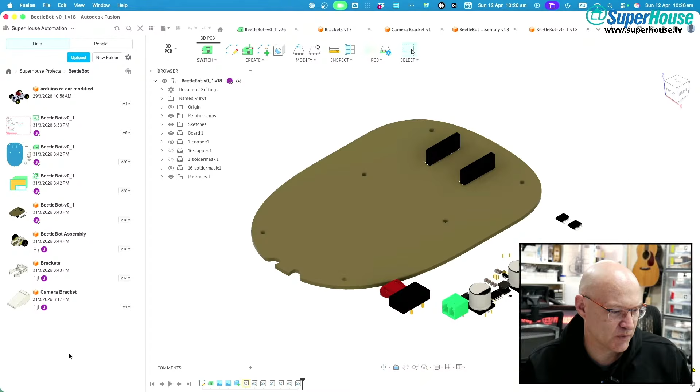I'm just wondering, I've got these two little compact PCs on my desk. One of those is running Windows, I believe, because I was messing around with some ESC software that was only distributed as a binary for Windows, and the other one is running Ubuntu, and I can't remember what's on it. I have a vague recollection that I had HAS installed on it, and I do also have HAS running in Docker on my Synology NAS, but it's not configured - I've just installed it, messed around with it, and that's it.

Okay, how about we actually look at the project for today?

Oh, Sion says, don't do HA, it's a total rabbit hole, once in you'll never get out. Yeah, that's quite possible, but I just keep coming across things where it could solve problems for me and do things I want it to do - things I currently do through Node-RED, or that I just don't do because whatever, I haven't done it yet. Reasons, things, time, you know.

Disk maker - my old name was Alan from Denmark. Okay.

So, welcome. Welcome, disk maker. Node-RED runs on HA. Okay.

Home Assistant is a gateway to ESP Home, says Paul. Yeah, that's another thing.

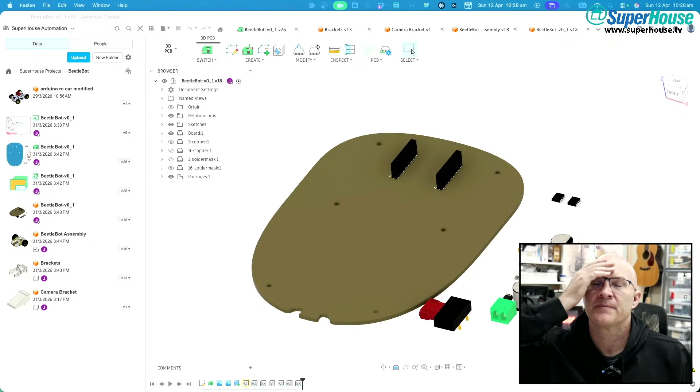You've probably seen Matt in the chat at various times, doesn't seem to be in the chat today, but he has been in the past. These PCs were previously inside payment kiosks for laundromats, and they've been replaced by other things. The payment kiosks now run Android head units with like a 42-inch touchscreen, portrait format, with an Android device behind it driving it.

So they ended up having a whole bunch of mini PCs surplus to requirements, and I've managed to finagle my way into having a bunch of them here, which is really handy. It's really cool just being able to grab a little PC, grab the Ubuntu installer which I have right here, power it up, stick Ubuntu onto it, and away we go. Tinker says surplus gear is a nasty addiction.

Yeah. Okay, so let's... Tinker says I have far too many i5 machines now, and another 40 on the way. Another 40, imagine a Beowulf cluster of those.

So now there's a throwback joke. How many people here remember Beowulf clusters from back in the early 2000s sort of era? Back when clustering PCs was kind of wild and out there.

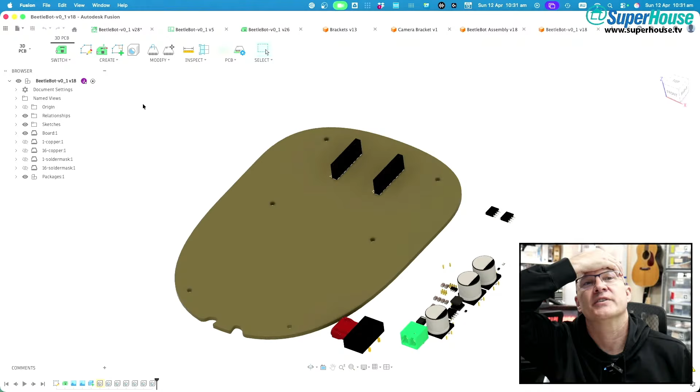Back in the 90s I did failover, like web server clusters with front-end proxies and load sharing, so DNS round robining and all sorts of those sorts of things. And what else did I do clustering with? I did clustered file systems like Gluster, GlusterFS, so file server arrays with clustered file systems. But that wasn't until... when would it have been? Early 2000s I think, it wasn't in the 90s.

Yeah, but the clustered web servers I definitely did in the 90s, running Squid in front of them as a reverse proxy. And there was some other reverse proxy I ran as well, can't remember what. Yeah, you can do the really basic.

Ooh, stop, coffee time, says Tassie Bob. Don't mind if I do. Thanks, Tassie Bob. Thank you, Tassie Bob, coffee time. That's actually a really generous...

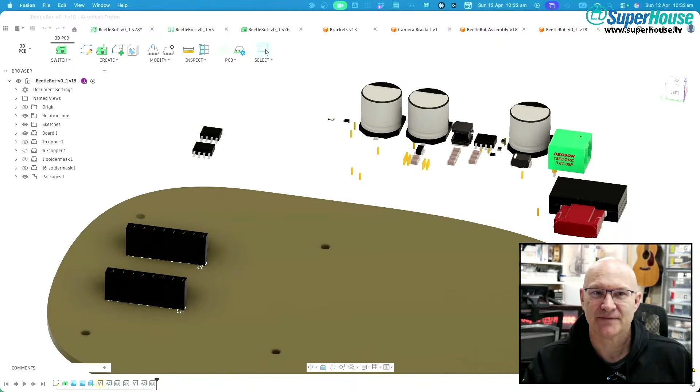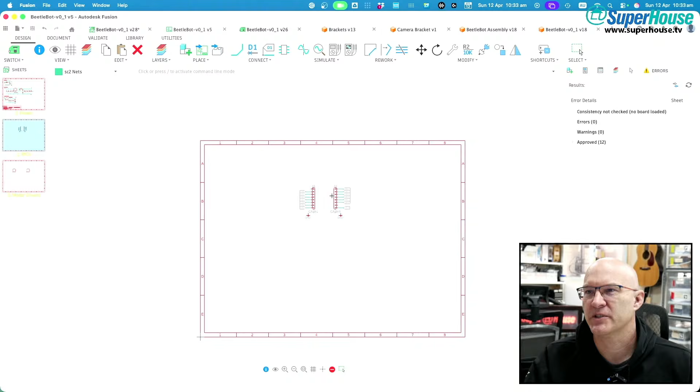We shall see. So this is for connecting the ESP32 cam. Now if you remember, cast your mind back to the early discussions of this project - the point with this was to move on from this design, which is the Lollybot design.

Is there a password on there? No, that's all right, I can show it. So this is the Lollybot design, which has the PCB chassis, motors mounted on top. It's got a Lolin32 Lite as the brains, driving two H bridges which drive the two motors with an onboard battery. This is the front, this is the back, drives along, woo.

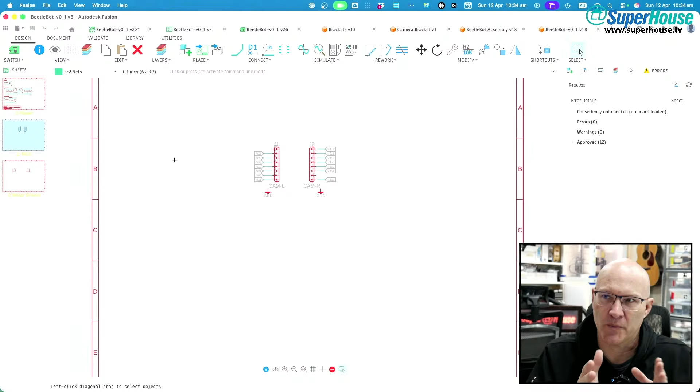Okay, now what I want to do is replace that with a system that has two processors on it. And the only reason for the two processors is that we want to add a camera onto the front of the robot. So we're going to have one ESP32 that does the outputs, it's going to drive H bridges, move the chassis around. So that is how we drive the robot, through one of the ESP32s.

Then we want to have a camera on the front, and in the short term, the simple way to do that is to use an ESP32 cam, which we're about to look at, which is a little module with a tiny camera on it. In fact, why don't I show you the ESP32 cam?

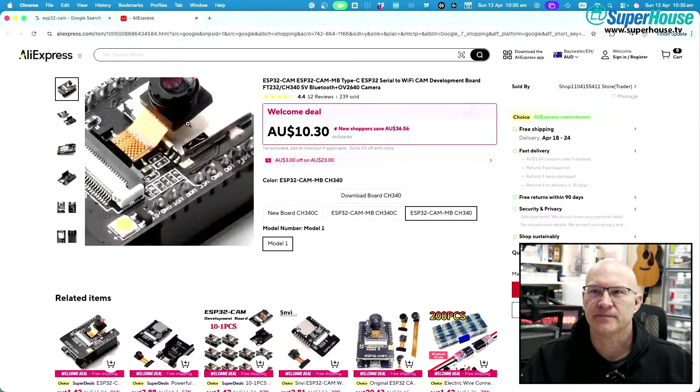Okay, so ESP32 cam, ESP32 cam MB CH340C. Let's look at this one, just as an example. This is a $10-ish board, including shipping, that has an ESP32 on it. Not that, that's the serial. Okay, I'm going to explain this a bit more. It has an ESP32 on it.

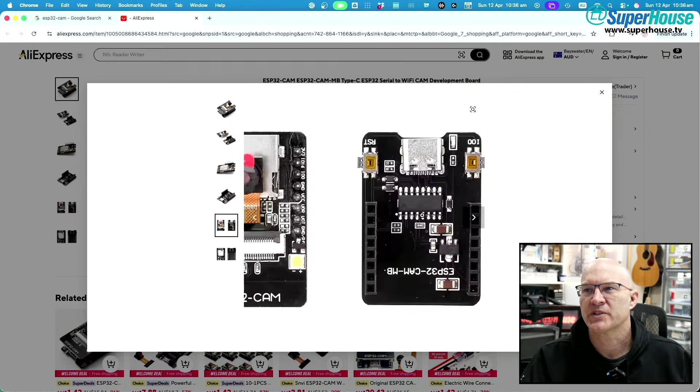And it has this camera. It's a very poor quality camera, but we're not taking glamour shots with this for a magazine. It's got the ESP32, the camera, an SD card slot, and some pin headers. It does not have USB on it, because this board on the right is a separate board which has a CH340 on it, a USB to serial converter, and a USB-C connector.

So what you can do is use the board on the left on its own. Which board is that? Here we go. Yeah, this is a better view. You use this board on its own - this is the one with the processor and the camera.

Or you plug it into this carrier board, which means you have USB that you can plug into it. Now, my intention with this is to not use the carrier board. The carrier board is handy if you want to program them standalone - you just plug a cable into it, you have the module in the carrier board, and everything is good. Life is unicorns and rainbows.

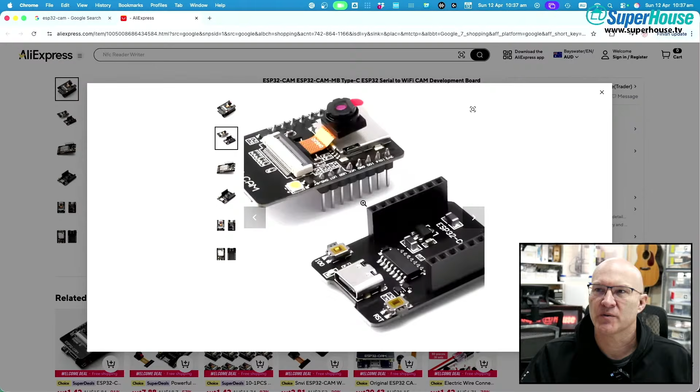But you can also just use this on its own. My plan is to use this board directly on the Beetlebot chassis and then pass serial comms through to the appropriate pins on here, and power to it, obviously.

So the question is, how do you physically mount this and get the geometry so that the camera is in the right place? This is something that has been debated through the ages - the ancient philosophers were at odds on this. They could not decide whether ESP32 cams should be mounted vertically with the camera at the top, or inverted with the camera at the bottom, meaning you could have a USB cable plugged into the top if you wanted, or should it be rotated sideways, in which case the clearance is better, it doesn't stick up as much, but the camera is offset from the center.

And also, how do you put the connectors in place to mount it so that this is at right angles to the main carrier PCB? So yes, the ancient philosophers could not agree on a solution. And I've come up with an idea which may be a stupid idea, and we're about to find out.

We are going to put it to the test. Now, this is my idea. You see the camera just here - in this picture, you can see that the camera is kind of just flapping in the breeze. It's got the ribbon cable, the FFC cable, going into this connector on the board, and the camera is not attached. The cable sort of pushes it down against the top of the SD card cage, but you can move it around.

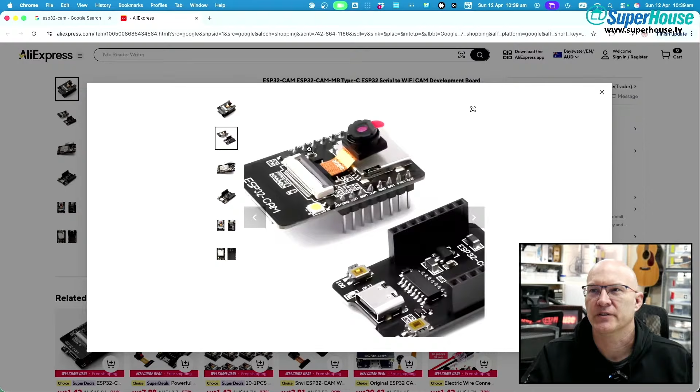Then my idea was, if you look at where the camera is right now, what happens if you simply bend it up so that it's vertical above the PCB and facing off to the left from this point of view? Can we mount it somewhere that allows us to put the ESP32 cam PCB horizontally, just plug it into the carrier PCB, and still have the camera pointing directly forwards? Can we? Maybe we can.

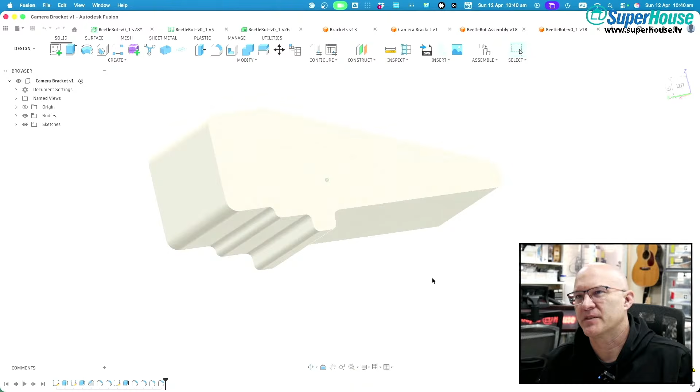Maybe with something like this. So this I designed and printed - this is all stuff I've done since the last stream. The purpose of this thing is that it's a bracket that glues onto the top of the SD card cage, and then the camera - this little guide here fits onto the back of the SD card thing - you push it on so that gets the alignment correct.

If we're looking at it from the side here, this area right here that I've highlighted is where the SD card holder would be. So it hooks onto the edge of it, you glue it down onto the top of the holder, and then...

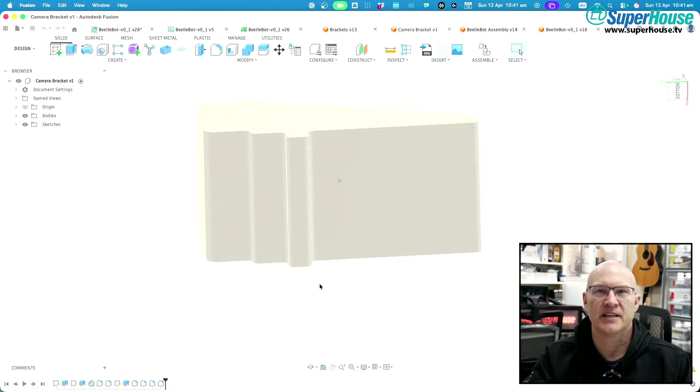This face right here is for the camera. The camera comes off, the little FFC cable bends up, and the camera glues onto this face. And because of this being a straight line here, butted up against the SD card cage, that forces the alignment, it forces this to be square onto the board, which means that the camera is going to be exactly horizontal from the PCB.

If you imagine looking from the back of the PCB, it's going to be looking straight down on the PCB from here. It's going to be aligned pointing forwards.

So let's see how that turns out. This is step one in a series of reveals of things that I have already done and have not yet necessarily tested. Oh, I've got to turn that camera on.

I totally forgot about that one when I was setting up this morning. I have my box of ESP32 cams here, including this one, which we will get under, where will we do it?

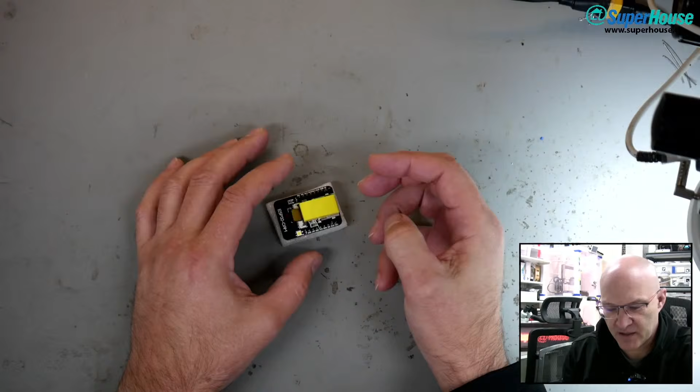Under here. Oh, I should zoom way in for this. Will I, won't I? Yeah, I will. I'm going to zoom way in, which is going to require... here's one I baked earlier. So I'm going to get focus sorted on that. About there. Exit focus assist.

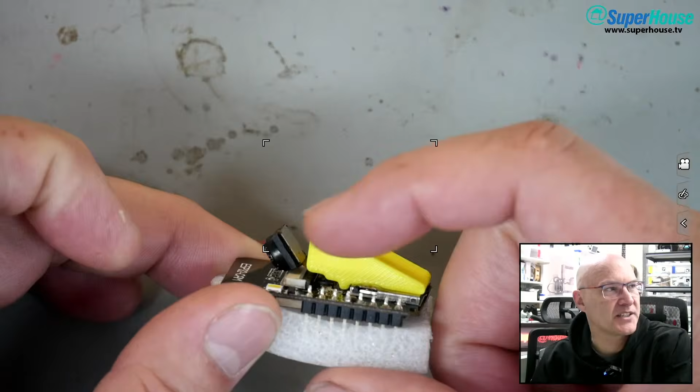So what you can see is this yellow thing is the 3D printed version of what I just showed you on the screen. The little ridge is under here. If I grab my trusty pointer, the little ridge is just under there, butted against the back of the SD card. This is glued on just with some of that Loctite gel glue, so it's pretty secure.

This face is where the camera will go, and you can see the camera here is just sort of flapping around. Now, the general plan with this is that the camera will be glued onto this face so that it is just pointing straight forward.

Now, this is the big unknown. I have a vertical constraint. I will show you this constraint in CAD in a couple of minutes. For now, I'm not going to explain it. You just have to trust me on it, and you will see why in a minute.

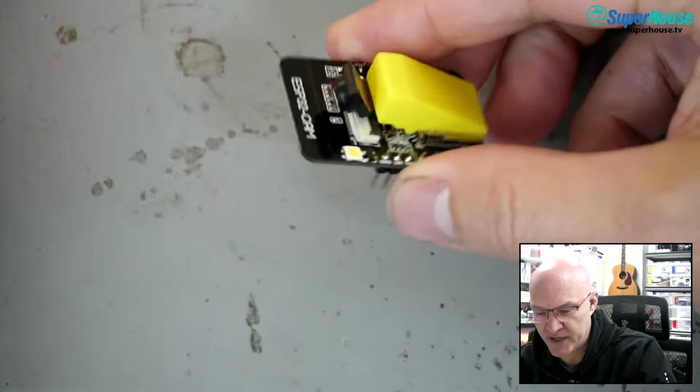There is a vertical constraint on the space that we have here, and the top of this bracket is the top of the constraint. We can't be any higher than that point. So the camera needs to butt onto the front of this and be pushed down slightly so that it is flush with the top of this mounting bracket.

So this raises a possible problem with the field of view of the camera. And this is what we're about to find out. Right now, ladies and gentlemen, we are going to do the experiment. What I don't know is if this camera is glued into this position, and if we look at...

What can I use? What can I use? Okay, I'm going to use this. I'll use the bottom of the box so that it's not visible because, come on, get in there, because it would annoy me.

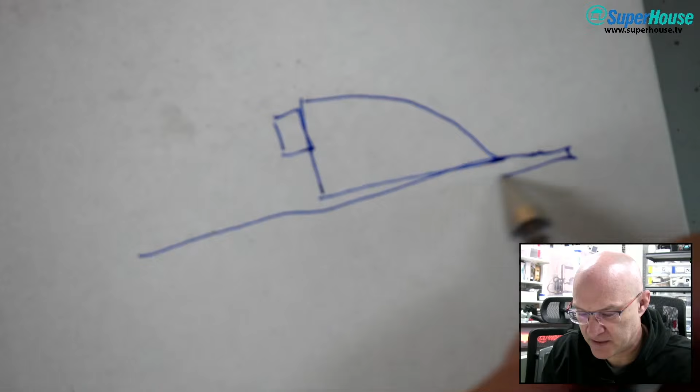So we've got the camera attached to the bracket, which is on the PCB like that, with the headers sticking down underneath. Brilliant artwork. Now the camera is going to have a field of view.

The question is, right there, is the field of view going to intersect the corner of the PCB? And if it does, does it actually matter? Is it enough to be a problem, or will the field of view clearing the PCB give us enough of a view of the front, looking out from the robot, to be able to see what we need to see? So that is what I want to find out.

Looking straight down on here, if that is there, imagine the light ray coming from the bottom of the camera out here. Is it going to touch the edge of this PCB?

So I figured that we just connect it up and see what happens. If this works, this is going to be a very easy solution to mounting the camera, because printing and gluing this on is very easy. Just stick the camera on there, bada bing, and we're done. And I really like that because...

Tinker001 said, those cameras are easily available with different length flat cables. Oh yes, that's a good point.

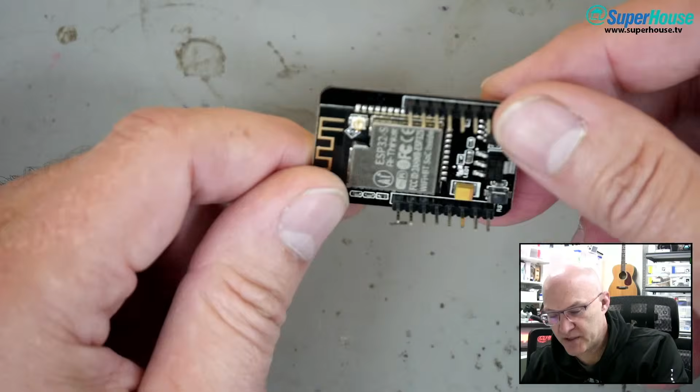So just in case you couldn't hear it, what Tinker just said is that these cameras are very easily available. I think it's like an OV something, I can't remember the part number. Very easily available with different length flat cables. So one option is to simply buy a camera with a longer flat cable, and then we could mount this wherever we want it. It could be mounted on the front of the bot and have the rest of it somewhere else.

So that's true, yes Tinker, thanks for pointing that out. Now, one of the design constraints is allowing for other people to replicate this. So if I don't mind doing things like buying an alternative camera and replacing it, that is one extra little barrier to someone else building one of these bots. It'd be nice if you could just order an ESP32 cam and use it pretty much as is, just by mounting the camera like this, and not have to buy this plus another camera.

Now, before I actually get to powering this up, I'm going to explain the reason that I want to mount it like this. So switching back to CADtastic, we've got Beetlebot assembly. Oh, I showed you something prematurely.

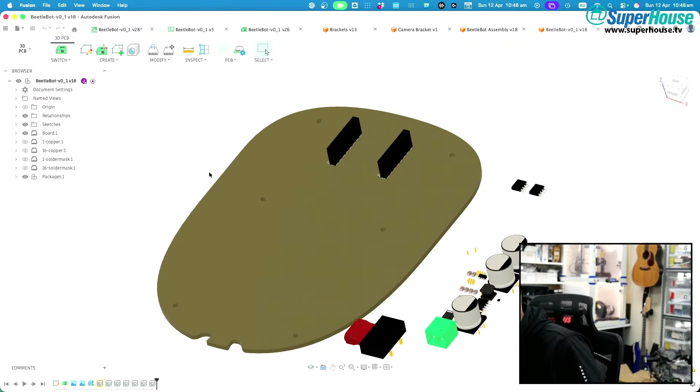This, so the PCB, I showed you the headers that I added here as placeholders that don't have the nets connected. Paul Schultz said, what's under the ESP32 CAM writing? What's under that writing? Oh, it's the antenna, the short answer, Paul.

So switching back to here, yeah, so your question was, what's under the ESP32 cam writing? And my assumption is that you're asking, can we just cut that off? Are there any components under there? There are no components on the carrier PCB, but on the bottom it's got the WROOM module, and you can see that the PCB antenna protrudes past there. So one thing that could be done is to cut off this part of the carrier PCB.

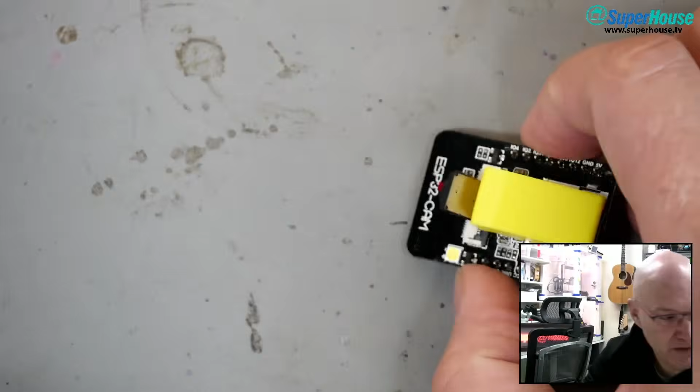We could score it with a knife along the top, just a line along here, and then snap it off by bending it away from this PCB, which would gain us a little bit, but you would still see the back of this PCB underneath. So Paul, yeah, that was a good question, and there is a possibility that something could be gained from that, but it's not as clean as you might have first thought of just cutting the end of that board off.

Yeah, so this is the orientation of the bot, and it's got a couple of changes. Now, you will see there are some holes in it. There's this little thing on the back here, which I'll explain in a minute. And these are the two connectors for the ESP32 cam. You can see that I've aligned them pointing directly towards the front of the bot, and it is set up so that you can plug the ESP32 cam straight down into it.

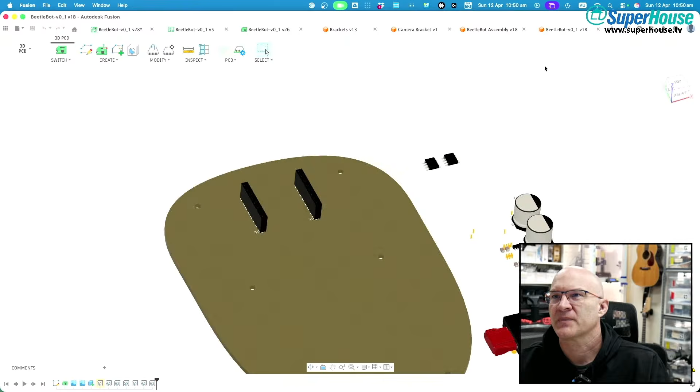And if the camera is mounted as I was showing on this bracket, the camera will be right about here, pointing directly forward off to the right here. And what this would allow is for us to have the main chassis PCB with the connectors. You get an off-the-shelf ESP32 cam and just plug it in and mount the camera on that little guide.

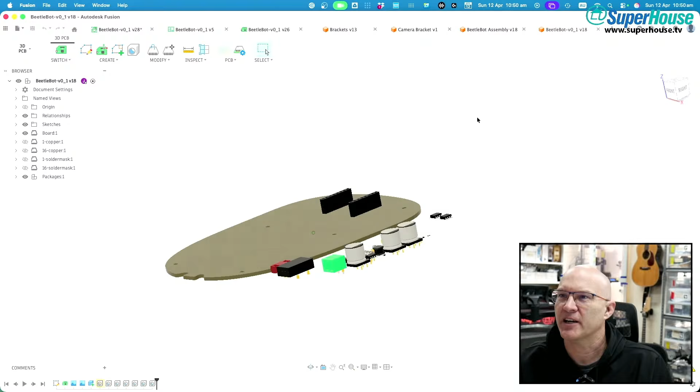Now, okay, I was talking about the vertical clearance constraints. So I have a project here, you can see it's called brackets V13. As I was working on this, I was figuring that I needed a way to mount the motors. So I started by setting up, all right, my original idea was I'm going to make a 3D printed bracket that will attach to the PCB and that the motor will attach to.

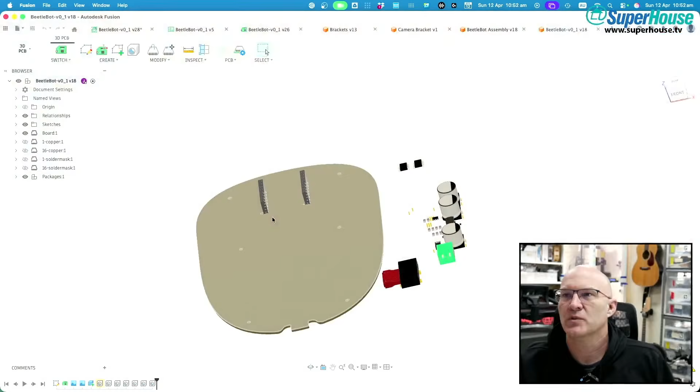So what I did, this was the sequence. I opened Fusion with the intention of designing a bracket that would mount the motor here, and the bracket would basically be a block. Austins_creations said they used a 3D printed mount and bolts to mount those motors.

Ooh, cool, nice one Austin. And Tinker's comment, which should be coming: can't mount the motors until cable tie shows up in the chat though. Yeah that's right, cable tie's not here. We need cable tie in the chat, and then we can mount the motors.

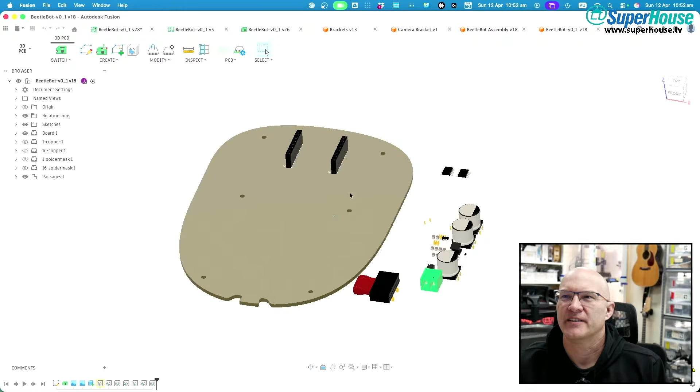Yeah, so my plan was a couple of 3D printed brackets. What actually happened is I started by doing a sketch in Fusion which was a projection of the outline of the PCB, so I could make the brackets fit the PCB perfectly. I began with this shape and extruded it so I could carve out the bits I didn't want and leave just the brackets. As I was doing it, I realized I could just make the whole body like that.

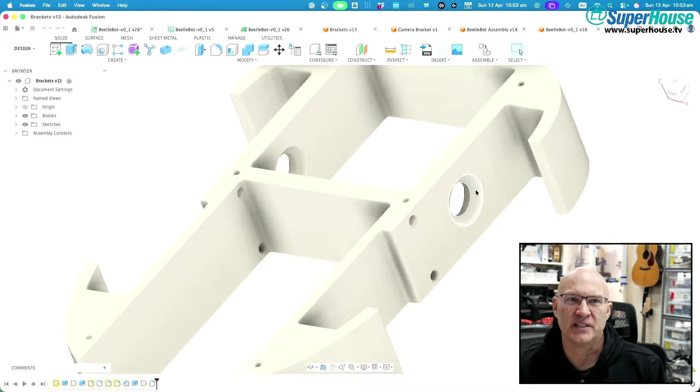And I ended up with this. This is a 3D printed bracket that has mounts for the motors. You can see there are holes here for bolts to mount the motors, one on each side. This hole is for clearance for the back side of the axle, because the motors have an axle that goes through them and sticks out on both sides. We have a wheel on one side and nothing on the other side, but that side is still there, so this is clearance for it to go through.

Then there's the back of the motor, which comes here. In a moment you're going to see all of this for real. There is clearance in the back here for concealed wiring for the motor power.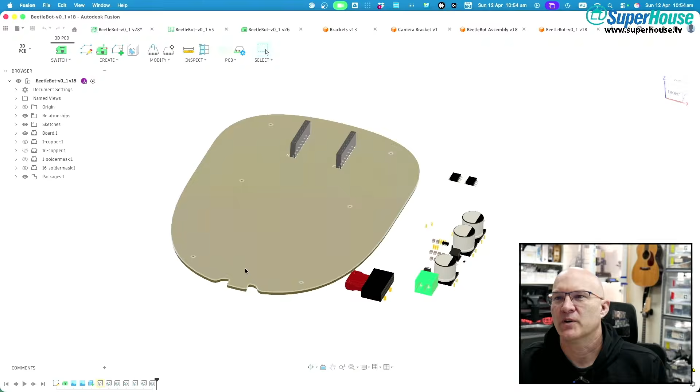This is looking from the back of the bot towards the front, and you can see this cavity in here. This cavity is for a battery, so there's going to basically be a hole in the back of the bot, and you can slide a battery in and then retain it with rubber bands, which is what these shapes are for. But I'll get back to that in a minute. Okay, then we have this cavity in the front.

So as you can see, I started with the outline. This outline was projected from the PCB dimensions, from the cut layer, the milling layer, so it's a perfect match to the PCB outline. You can see the holes in it here are also based on projections from the holes in the PCB. There are 6 of them, 3 on each side. If we look at the PCB, they're an exact match to these holes, but they're smaller.

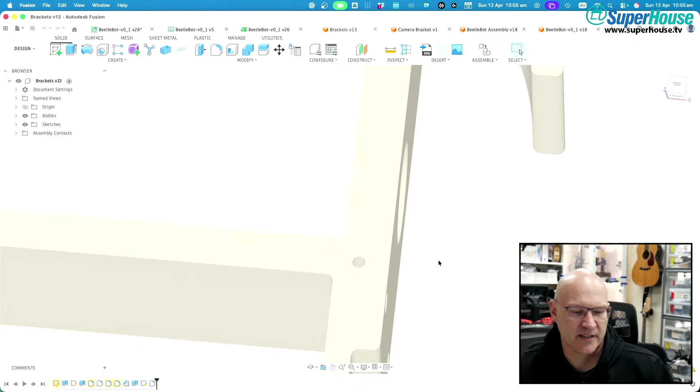The holes in the PCB are, what are they, 2.4 millimeters, and the holes in the plastic are smaller, like 1.7 or 1.8, so that 2 millimeter self tappers can be used. If we have a look at this one... oh, those shortcuts don't work in physical mode. What have we got? We've got 1.6 millimeter holes. So 2 millimeter self tappers will go through the PCB and into the plastic.

No, I didn't want to sketch. Okay, so they go through the PCB and into the plastic to mount the PCB on the bottom of this bracket. And the PCB will then form the bottom part of the cavity where the battery goes in.

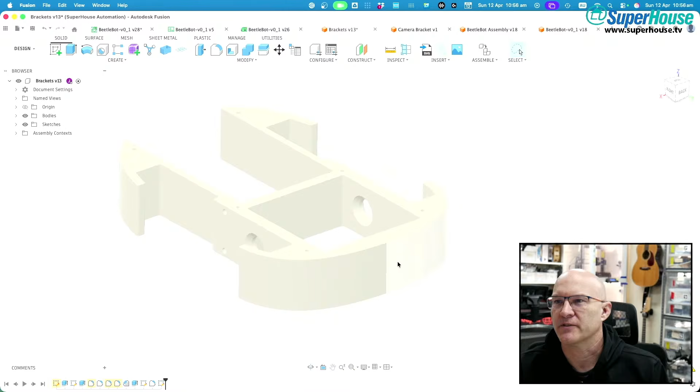Then the ESP32 cam goes on the front right here. It was at this point that I was looking at brackets and how to mount the camera and how to mount the whole ESP32 cam. That was when I decided, hey, why not put it in horizontally and then angle the camera to bring it forward. And that's what we're about to test.

So this sort of thing is the PCB. Is this out of date? It doesn't have the connectors visible. I wonder if... or is this out of date? One of my... no. Where is the 3D representation? Yeah, okay, interesting. I wonder why I have those hidden in there.

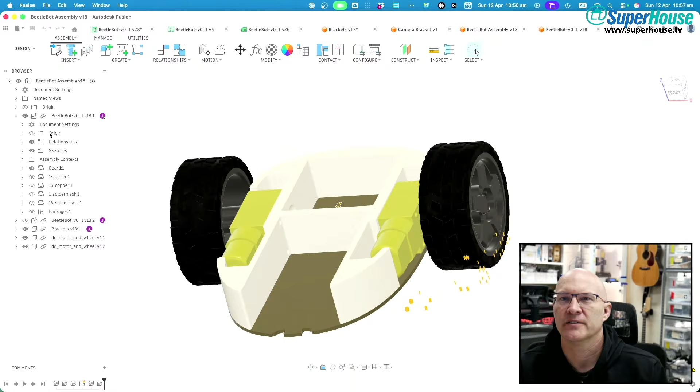If I have a look in here, what have I got? Solder mask packages. Oh okay, I just hid it so that these ones would disappear. So you can see the two headers in there for the ESP32 cam to mount. I'm going to have to carve a hole out of the front of this for the ESP32 cam and for its camera. You can see here that there is a cavity.

Now these motors are not exactly in their right place, I think, in this model. Yeah, I moved a couple of things. They need to move. Oh no, that's right, the models aren't quite accurate.

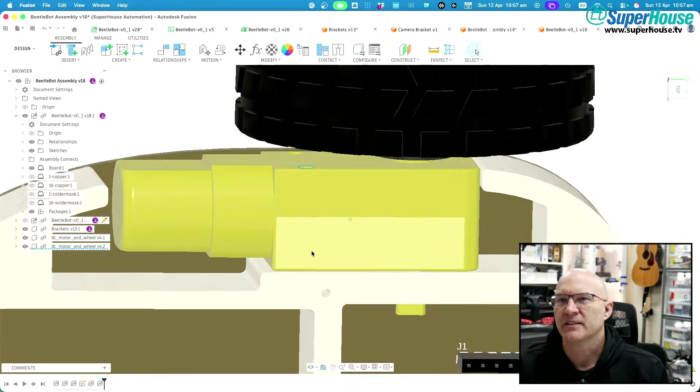The way these work is that this hole is aligned with the hole in the motor. But the thing is that this 3D model I imported of the motor and wheel assembly is not entirely accurate. It's actually sitting slightly further back, because on the real thing the holes through the motor are very slightly further forward, which means the whole thing sits further back. It looks like it's jammed up against the front here and like there's a big cavity at the back, but it's actually pretty even in real life, like when it's physically printed.

Right, I have some iterations here. Which one was one?

Yes, so this was the first one I printed, which had a few issues. I needed to adjust some clearances around here to make the motors more stable. There wasn't enough room here, and the motors tended to twist in this way because the mounting holes were right up close to the edge.

So this was iteration 2, and I extended the support, increased clearance around the front of the motor, made a couple of other minor changes. This is iteration 3, which has more clearance around the front of the motors. It's got clearance at the back so that the wires to the motors can be concealed - almost concealed anyway. They will go onto the PCB, onto little connectors or something inside that gap.

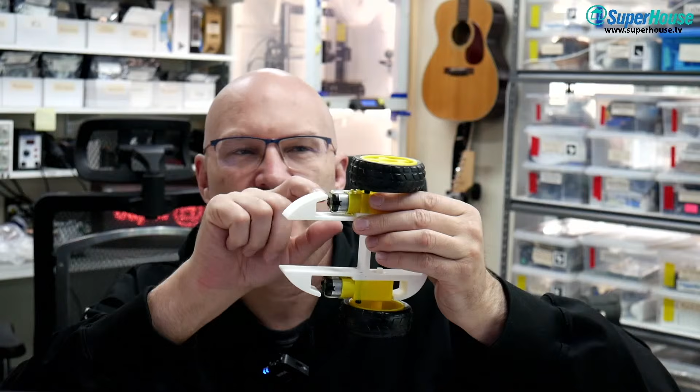So that is where we need to put the motor output wires on the PCB. Apart from that, it all does what it should.

So if we look at this, this is the Lollybot, basically overlay that with that. Imagine that the Lollybot PCB - we don't have the real PCBs yet, but imagine the Lollybot PCB is the PCB that goes on this. It'll screw on, and you can see the outline of the PCB following around here. And this PCB has squarer edges at the front, but imagine that the PCB was rounded off so that it matched the contour of the plastic, and that is essentially what we would have as a little sandwich.

So it's coming along. This is the reality of this concept.

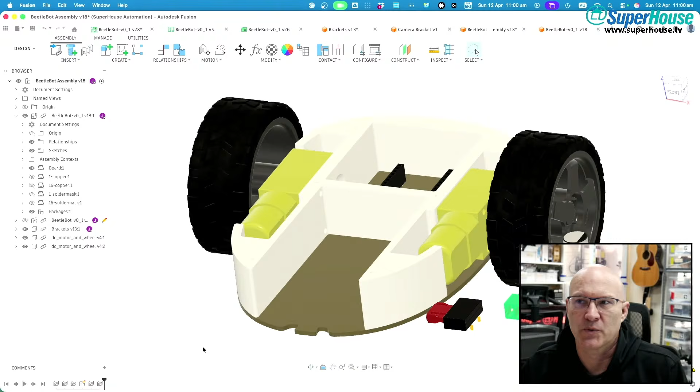Now this gets us back to the ESP32 cam. Oh yeah, sorry, and explaining here - so what's going to happen is that there will be a top deck as well screwed into the top. We've got the PCB, which is forming the base.

Then we're going to have an identical shape on top, which will probably be laser cut acrylic, but it could also be another PCB. I've been very seriously thinking about this. What I could do is design a second PCB which is mechanically identical to this one, so we'd have a bottom PCB and a top PCB.

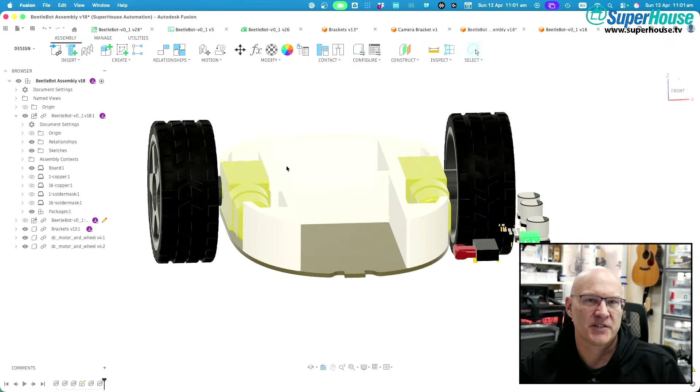And the top PCB would have locations for mounting the arm that sits on top of it. So it might have holes, like screw holes through it, for mounting the bracket for the arm on the top. It could have electrical connections - we could pass through from the bottom up to the top. We could have some connectors for the power and control of whatever external things are added onto this. Like if we add a robotic arm onto it, we're going to need power and control - they could be brought out to connectors.

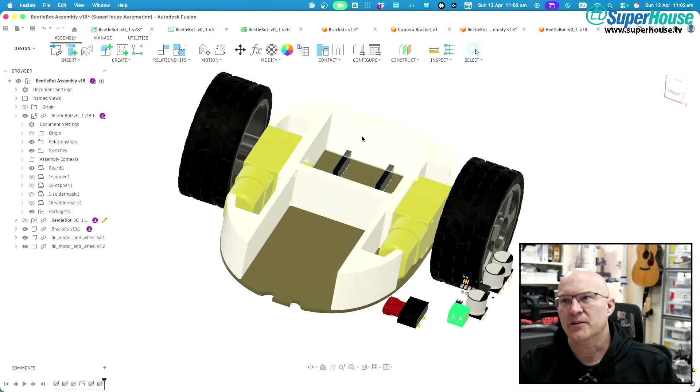So I think what I'm probably going to do, for my very first iteration, just to get this done quickly, is order the bottom PCBs and just laser cut the exact same shape out of acrylic and screw it into the top. That'll get us a little platform that can drive around with nothing attached on the top of it. And then that'll allow us to do testing of the basic movement functionality, like the motor control and the camera.

And then while that is happening, and while the software people are doing their magic with this, I can then move on to designing the PCB that goes on top, which could be optional. I mean, what you could do is build the bot with just a plain top cover, or you could build it with the PCB top cover, which gives you extra things.

And we could also have multiple PCB top covers. So we could have one PCB top cover that is suitable for mounting a robotic arm onto. You might have a different PCB top cover which is designed for a LiDAR, so it's got the correct mounting holes and pinouts and all of that sort of thing.

TTS being dumb again. Design the top plate. Oh no, I think it just hasn't caught up. At Tinker001 said, various optional top PCBs. Optional diamond cutting disc. Okay. Yeah, it was just taking a while.

So design the top plate as a grid of M3 circles. Becomes a pegboard of sorts. Yeah, and Tinker said various optional top PCBs. Sorry, I wasn't paying attention to chat. You are definitely thinking along the right lines. Austins_creations said, design the top plate as a grid of M3 circles, becomes a pegboard of sorts. Yep.

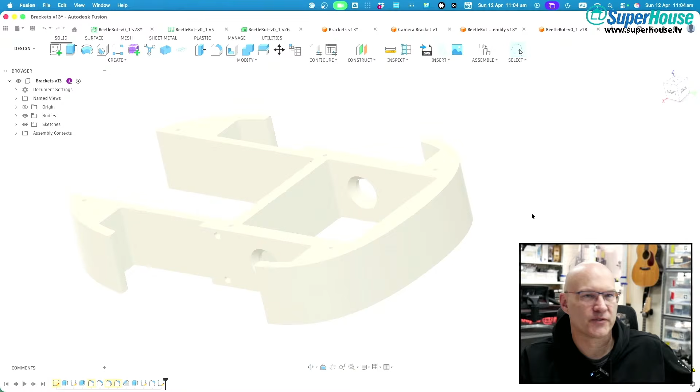Yeah, that was my original plan. That's actually what I was going to do. So I had got to the point of designing this and printing it. I'd already gone through these iterations and got to this point, and I was looking at the front of this thinking I wanted to flatten it off and make a way of mounting the ESP32 cam on it.

And that was when I decided I would investigate doing it this way instead, with the headers this way, so that the ESP32 cam plugs in there. Now it's not going to get in the way of other things, because if it's plugged in there, and also the height—this is where I was talking about the vertical clearance.

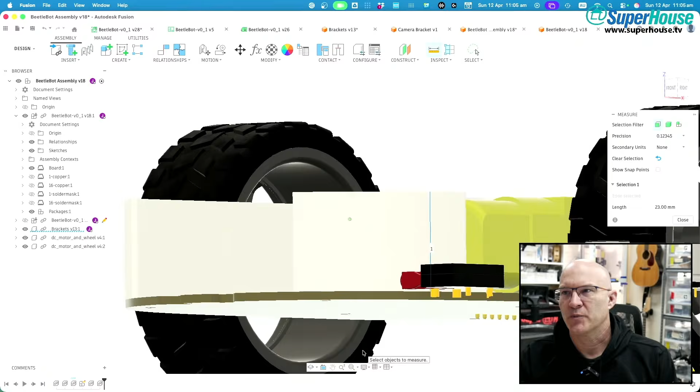So if we look at that distance, that is 23mm. That's the thickness of the 3D print, which is based on the thickness of the motors. Now it doesn't need to be—you could make it thicker, but it's just a sensible sort of thing. We don't want to make it too thick either.

So if that's 23mm, and then these connectors are typically 8 or 8.6mm high, by the time you add the plastic on the bottom of the pin headers, and then the ESP32 cam, then the SD cage, and then the bracket on top of it, that ends up being 23 millimeters high. It fits perfectly under there with the camera attached.

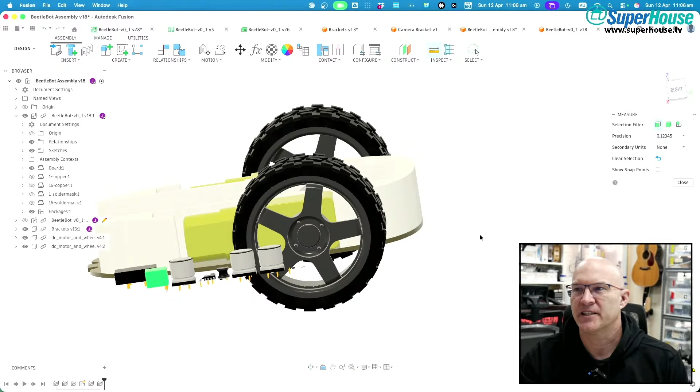So then, yeah, maybe later I'll end up designing a different way of doing the camera. But for now, this is a very quick way of getting to an end result. And that's basically where I left it. It was at the point where there is no point progressing with this design until I know what the field of view issues are with the camera.

Disc Maker said, how about 2 pink LEDs as lights on the vehicle? Yeah, well, there could be lots of LEDs, RGB LEDs or something. Some illumination. It probably should have headlights or something.

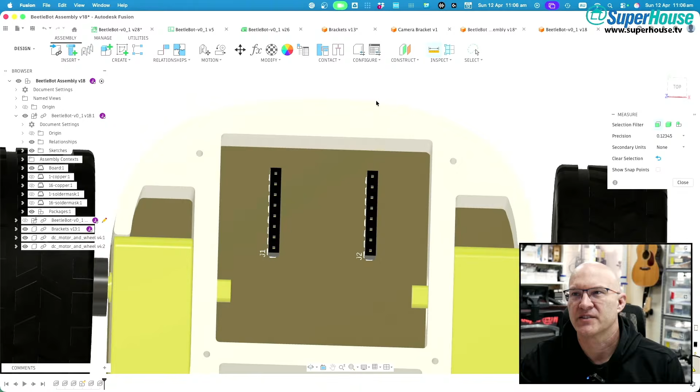Grant says, how does the camera see through the wall, or am I missing something? No, you're not missing anything. What I need to do is carve out the middle part of this, so this wall will be missing. You can see the width of the camera module from here. It'll actually protrude out to about the front point here. And I'm just going to have to chop a rectangle out of this so that it can see through.

But before I do that, this is the thing—this is all a bit unknown right now. Tinker001 said, prying the pin spacers from the ESP32 cam board would give you an extra 2.5 millimeters of height clearance. That is an excellent point. So if you couldn't hear that, Tinker said prying the pin spacers from the ESP32 cam board would give you an extra 2.5 millimeters of height clearance. Yes, that is an excellent point.

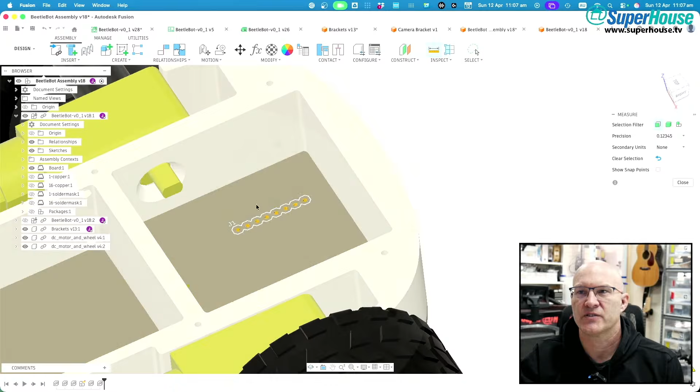And there are also low profile sockets that you can get. And the other thing I could do is not use sockets. What I could do is just put the ESP32 cam straight into the holes and solder it on from the bottom. Then it would be elevated by 2.5 millimeters, which is the thickness of the plastic spacers above the PCB. And that actually may be best, because if you look at the camera bracket, all of this is sitting above the ESP32 cam, which occupies sort of—whoops, that's not what I wanted.

I wanted a—no, that is not at all what I wanted. Can I do a selection? In fact, why is that selection mode doing that? What has happened?

Create. I must have hit some weird selection mode. Fit, zoom, look at - I don't even know how that, grid and snaps, viewports. I don't even know how I got into that selection mode.

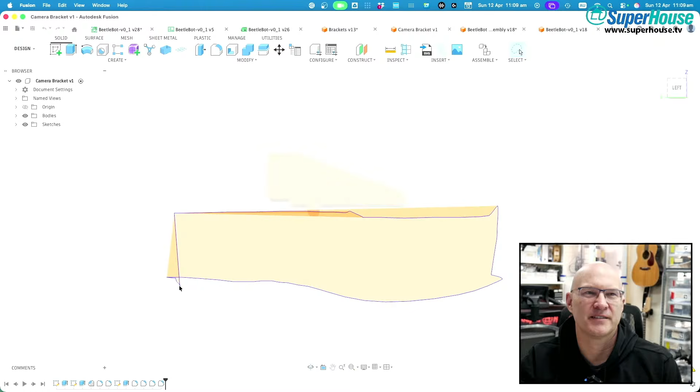All right, let's try it this way. If I go from there to there, there, there. Okay, kind of there is about where the ESP32 cam board is. And this is butted up against the top cover, which means the camera is not in the center of that cavity, it's right at the top, which means that the top cover would need to have a rebate to give the camera a better field of view, or that the top of the field of view is going to be cut off entirely, which may not be such a problem. But step one is power up an ESP32 cam, see what happens.

Wagonline says, can you use a cell phone zoom lens to poke the lens through a front hole? Maybe. Yeah, I don't want to change the field of view too much though, because the bot does need a reasonable field of view in order to drive around and find things, and to recognize characteristics in its environment for the machine learning system to deal with. So I don't want to give it too much of like a telephoto tunnel vision sort of effect. I want to keep it a reasonable field of view.

Now, I think I need to actually do this. What is going on with that? I don't know, I don't know. There is a USB to serial converter there.

But that means I need to find jumpers. This is my little jumper cache. Oh yeah, this'll do, I need to go pin to socket. I only need 2 of them. So these 2 connected to power on this.

Where is power on that? There is 5 volts, ground. So I think it's these 2. Those 2 should be 5 volts. Yep, looks good. Okay, I've never actually powered this one up.

This is brand new - brand new, like 5 years old, or however old. And I don't know what firmware is on it. What I'm hoping is that it's going to have some firmware that is half vaguely sensible.

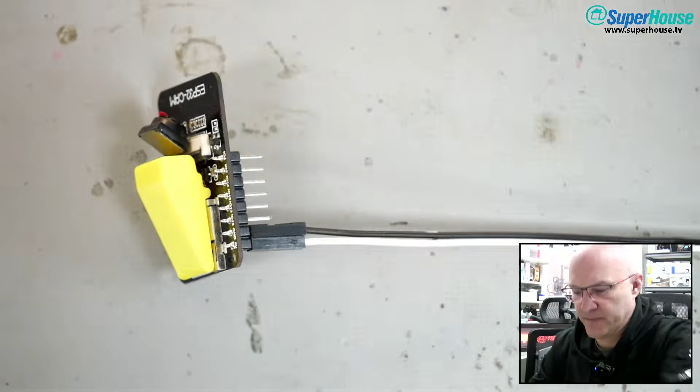Get out of that. Got to set the lab supply to some sensible amount. Let's give it 5 volts, 1 amp. And we'll power it up. Now we're super zoomed in, but that's okay. All right, and power on.

Do we get any indication? Well, it's pulling 160 milliamps, so it must be on and running, must have its Wi-Fi up. Now I'm going to give it just a moment to boot, so it should be booting. Then I'm going to look for it from my phone, see if I can connect to it. But I'm going to have my phone slightly off camera, just in case.

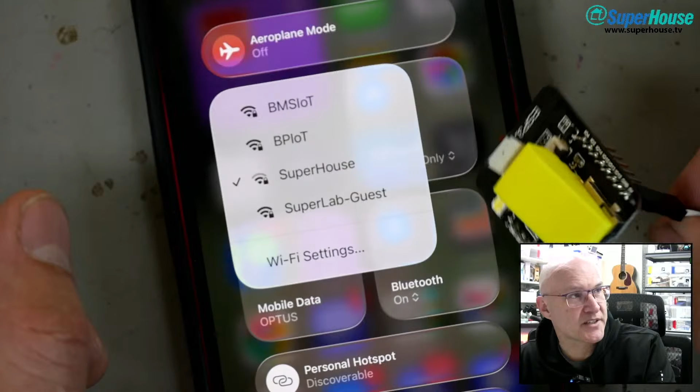While I connect, and we'll see if - yeah, it looks like it hasn't come up yet. See if this updates, because I think what these do is come up as an access point so that you can configure their Wi-Fi. I may be wrong about that.

It could be that I've got to configure it through serial or some other method. Hang on, what was that one that just came up? I don't think it was the one I'm looking for. Yeah, there's a TP-Link something somewhere. That's not me though, and it's not this.

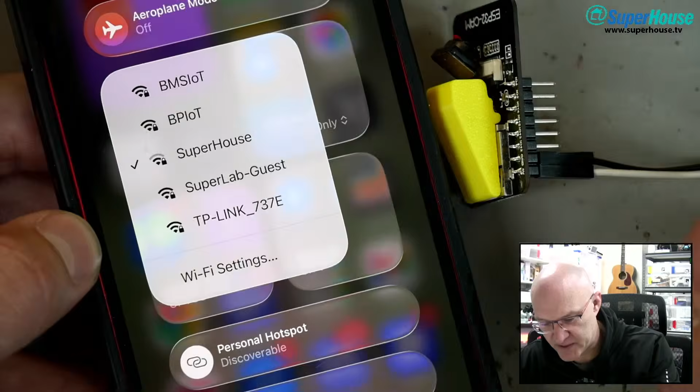Weird thing is, TP-Link is the strongest network here, stronger than Superhouse. Why is that so weak? Maybe I'm connected to the AP down the back of the factory instead of the one that's just close. I think TP-Link might be next door.

Alright, it looks like we might have to actually do some USB serial shenanigans to figure out what's going on with this. It doesn't seem to be going into AP mode. Is there a way we can put it into AP mode? There's a reset button. Resetting it multiple times might do it, but that depends on the firmware.

ESP32 cam, okay, let's have a quick look at an ESP32 cam getting started sort of thing. My SSID - oh, mine had no software on them. I have 3. Says Jiski.

Okay, I'm gonna bring you back to here in just a moment. ESP32 cam - yeah, the ones that I've got, so I've got a few of them, and I'm pretty sure that out of the box they had some demo firmware on them.

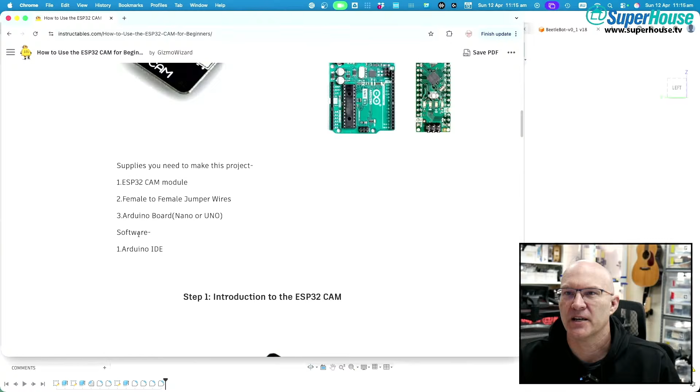So, ESP32 cam for beginners - let's see what it says. Supplies, introduction to that, let's skip through this. And it does not have a USB port. Preparing the Arduino IDE for programming. This is suggesting that you need to flash it with something. Attach according to that, okay. Oh, I wonder what that is - that's probably putting it into bootloader mode. I bet that's something like ground and IO0.

Do all of that, store them in a folder, and that - fake Wi-Fi credentials. Alright. It's a little bit sad that you have to do all of this - I thought that it would have something out of the box.

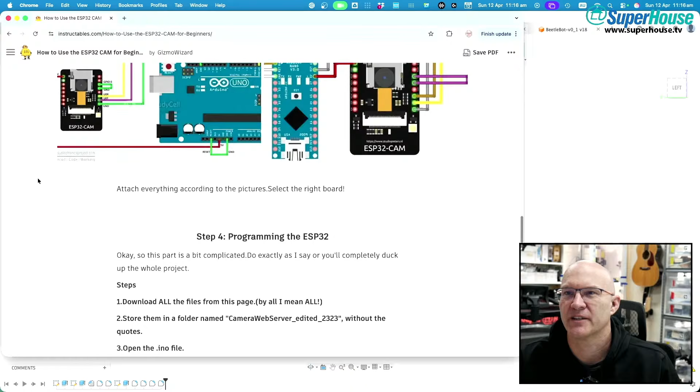Let's start by hooking up the USB serial board so that we can at least see if there's anything booting on it, which would be step 0 before we - and we've got to do that anyway. If we're going to reflash it, then we need to. Instructables is still around - Instructables, it is.

So I'm okay. What do I need to do? I need to leave that open. Alright, we've got TX and RX - which is which? And... okay, so TX out of there is going onto there, and reset. So it's got a reset connection as well. We may not need that.

In fact, I don't think we do. For a USB to serial converter, that's probably just so that both boards reset at the same time - we're not even doing that at the moment. We're going to be using a USB to serial converter. Let's move over to here and do it for real.

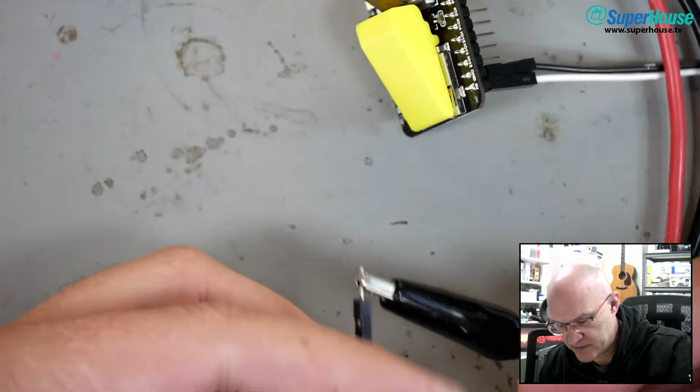Ooh, this one - this is one that I've had running in the past. Let's see what happens with this. Turn that one off and connect power to this one. So this one was previously connected to the USB to serial adapter, so I've just turned that one on. I suspect this one is not going to come up as an access point.

It may have some other firmware on it because it was being used to do stuff. And on this one, the camera is glued down. But we might get lucky, so it's worth a shot. I'll see if it's come up on an AP... I'm not seeing it.

Other, new, update, update... No, I suspect that the firmware on these does not support being an AP. So I'm going to switch this cable over, use the other jumper wires on this one, because this is the one where I want to check the field of view. So we're going to go...

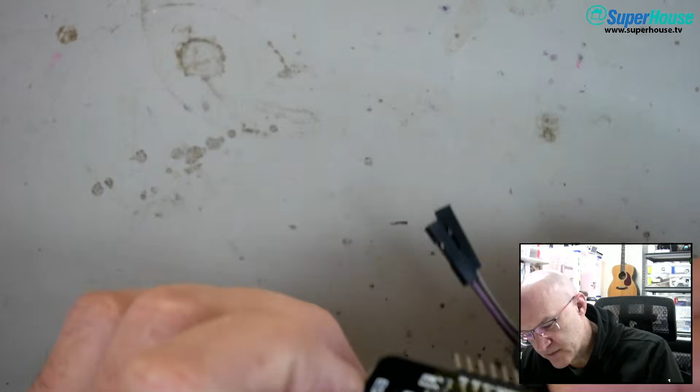Where is it - ground and 5 volts, these two. And then I want TX and RX, which are where? Come on, your eyes must be better than mine. You what? I don't know, I don't understand what that means. The labels on this sort of thing are weird. Okay, I'm gonna have to look at the pinout on this.

Oh no, I've got the... is it that way? Yeah, so that's reset, RXD. I'm just going to attach these two and then I'll figure out the colours at the other end. So it goes into the second and third along on this side - that should be TX and RX, which means that the grey one here, which is this one, is going to TX. Yeah, you can't see what I'm looking at.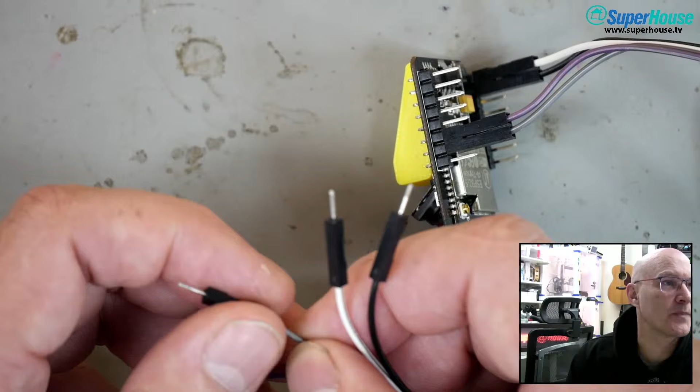I'm looking at the pinout diagram. So that is going to TX on the USB to serial converter, and TX is there - so that's TX out. This one is RX in, goes to there.

At Austin's_creations said, Arduino has an example sketch that you upload and edit with Wi-Fi info. It is what I did when I ordered mine way back when. Nice, thanks Austin. And V out coming from there for 5 volts to power it.

Okay, so we have this wired with this, and then we can connect to it from Arduino IDE to flash it or see what is going on with it in general. So I need a USB cable, that one, and I'll plug this into the hub on my bench.

There we go, powered up. So hopefully this will now be booting. If there is anything on it, we will see. Let's find out.

Okay, while I'm waiting for Arduino IDE to boot, what is going on with the chat? Okay, Wagon Load says: I programmed my ESP32 cam with a USB FTDI UART adapter and 4 wires. Yes, that's exactly what we're doing right now.

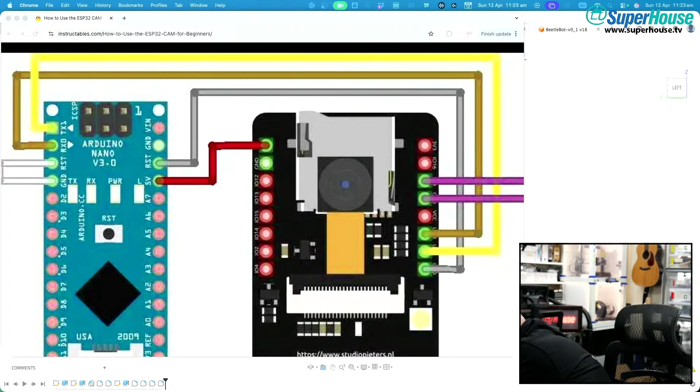I am going to hit reset while you can't see, just in case it does dump credentials or something to the bus. I'm not getting anything on serial comms, which is interesting - I would expect to get at least a startup message of some kind. All right, I'm going to try. The pins on the bus go high and low, high and low.

Okay, let's find the 'If you have fewer' example. If you have fewer than 16 devices connected, you're a slacker. Yeah, I have fewer than 16 devices connected.

Well, I had 4 serial devices connected, plus all of the other things. I've got 1, 2, 3, 4 USB hubs plugged into this computer with multiple things in each hub. So I don't know how many things I have on the bus at the moment, but it's a few.

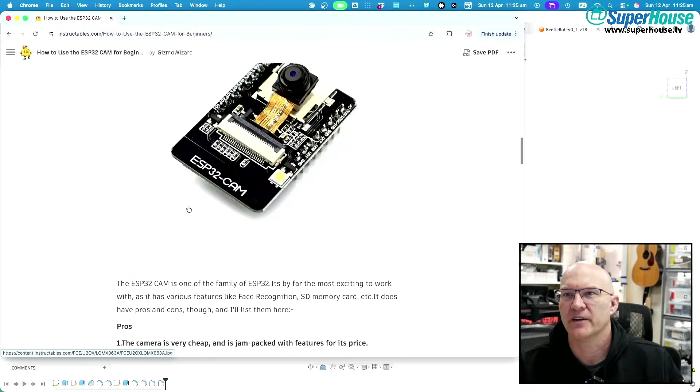All right, where is the example for this, the ESP32 cam? Now I need to grab - what I need to do is come back to here. How to use ESP32 cam for beginners. Where is the code? All right Austin, do I just grab the code from here, or is there somewhere else that you recommend?

Examples menu - yeah, but where? There is a very big examples menu. If we go to, like if I just bring Arduino IDE up here so you can see it. I've clicked, waiting for it to open its menu. Come on, come on, I have clicked the file menu, open Arduino IDE, you piece of rubbish.

You'll get there eventually, come on Java, do your thing. Okay, now examples, where is the ESP32 cam? Now first thing I'll do is, actually I'm going to change - okay come on, here we go, hands off, waiting for it. Okay, I'm going to change this to...

ESP32 Wrover Kit, is that the one? I think that's what the README said - ESP32 Wrover Module, that one. I think that's what this says.

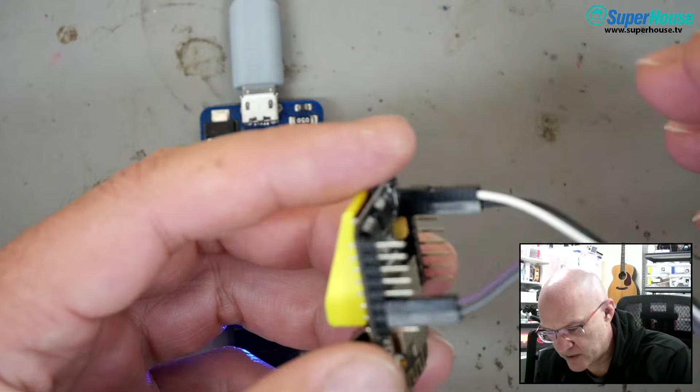Might also need to be in download mode.

Yeah, true, that's true. I should bridge IO0. _creations said, might also need to be in download mode. Yeah, it probably isn't because I don't have RTS connected to reset. I could just connect that. That would be a solution.

Crispian says, is it time for bed already? Maybe. And Stephen says you aren't controlling IO0 or reset. Yeah, I brain farted on that one. I kind of got so used to having that being taken care of for me already that I wasn't even paying attention. So...

Where's a suitable chunk of wire? One of these could do it.

So I think what I'm going to do in the first instance is connect RTS from the USB serial converter to reset, so that we've got auto control of the reset line. And if that doesn't work, I'm just going to poke it in the brain: I'll short IO0 to ground, force it into bootloader mode, which I shouldn't have to do.

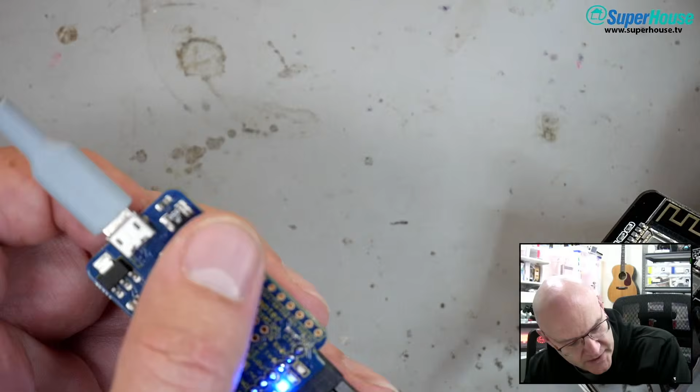Tinker is messaging me, yeah, about me doxing myself. No, okay, I've got to slow down and actually think about this.

What do I need? RTS, that needs to go to reset. Okay, that goes to reset, and then I'm going to bridge IO0 to ground.

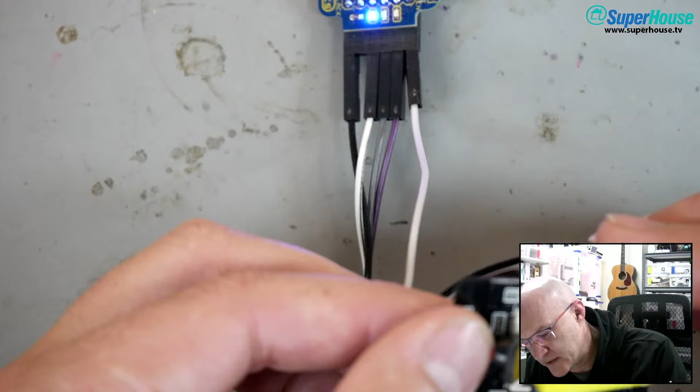It's not that awesome because I am screwing up royally. Okay, I have a new plan. What I'm going to do, here is my new plan: I am going to bridge IO0 to ground, which is this one, and then press reset, and that is going to stick this into bootloader mode.

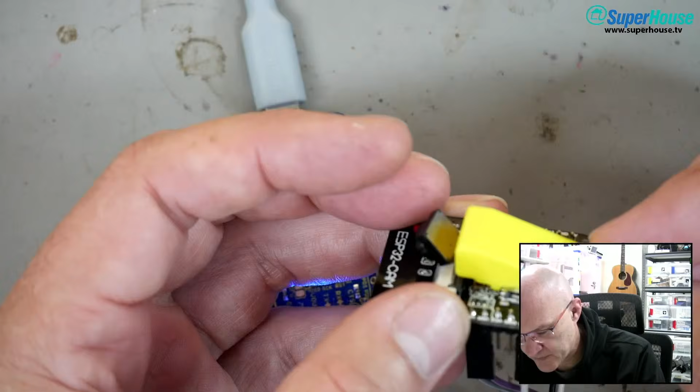Where can I find a reliable ground? How about there? I'll jam it in there and press reset. We should put it into - oops, I'll try that again. I'm going to hold that there, press reset.

Okay, so it should be in bootloader mode now. Now let's give it another shot. Try uploading again. Upload. Do it.

Please, please, please. Pete, thank you for the super chat. Ah, very cool. Paul says the jumper for reset looks to go to adjacent pins. Yeah, reset is a button on the ESP32 cam, says Amanda. Yeah. Account works on the phone, just desktop stuffed. Oh right, that's Pete talking about his alt, etc.

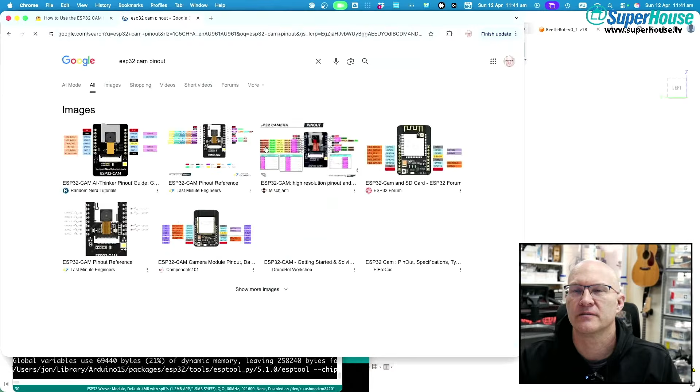Yeah, so looks like - so this is interesting. ESP32 cam pinout. What do we got? Is there a reset anywhere here? I don't think there is. There is no reset exposed on the headers.

So we've got power rails, we've got multiple grounds. What would have been nice is if one of these grounds had got reassigned to be reset. We've got IO0 exposed at least, so we can force it into bootloader mode. So we've got an error on upload.

Yeah, alright, I'm going to try two things. I'm going to decrease the upload speed. 001 said, that's just silly. Yeah, that is just silly. I'm going to decrease the upload speed, just cause.

And I'll reset your face, says Pete. At RelWareTech said, we'll reset your face. Yeah. And do you have RxTX reversed, says Tinker? Yeah, I'm just going to try switching those back around again and see if that makes a difference. So we'll take... 001 said, you have RX TX reversed. I may have.

So I'm going to turn that around, plug it back in. I'm going to do the bootloader reset dance again. Where's the button? Oh, now I've got to plug this back into IO0. IO0, it's the third one along, that one. So that is IO0. And why isn't that?

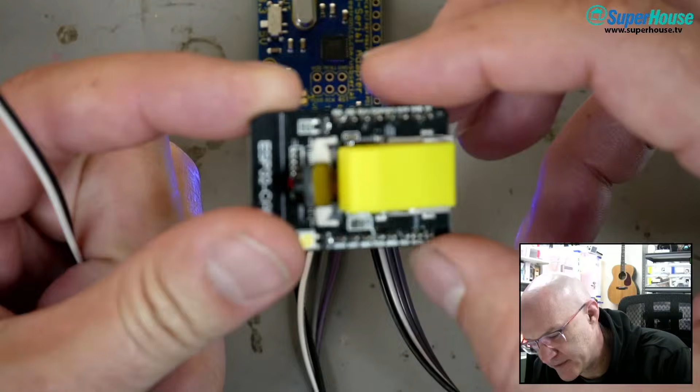This is just falling off. I suspect that this jumper is not even making electrical contact. There, rubbish, rubbish. So I'm going to find another one. Yeah, I'll use one of these. Here we go. Where is IO0 now? There. I'm going to take that one, plug it into IO0.

Oh, and this is just, what is with this? It's just loose, these jumpers are falling off. Oh, that one actually plugged in properly. Okay, so it's possible that a moment ago when I was trying, I simply hadn't put it into bootloader mode. All right, I'm bridging IO0 to ground, press reset, let go of reset, let go of the ground. Okay, it's in boot, should be in bootloader mode now.

Pete says, hey Jon, you coming down for winter? First seasonal snow on the mountain today, woohoo! Oh, okay. I could come and visit you down in Tassie to go and play in the snow. That'd be fun.

Wagonload says, I have a KiCad diagram for the ESP32 cam programmer, just 4 wires. Send me the link where I can upload it.

Yeah, it is just 4 wires, which should be the 4 that I've got connected. It's a CH340 USB to serial converter, pretty straightforward. And that's what I've got implemented, plugged in right there. So I've got the 4 wires.

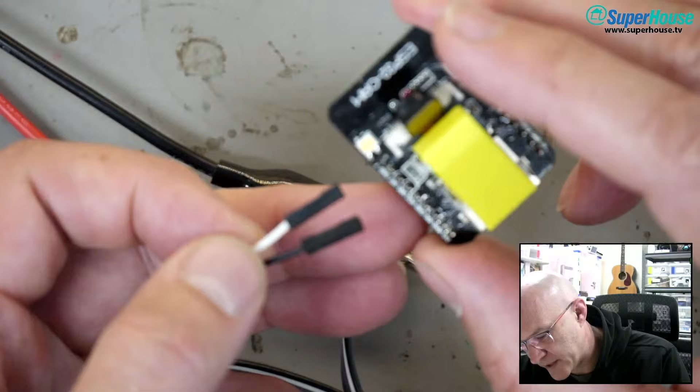So what I'm going to do is connect, yeah, more amps. I need to connect a ground, which is right next to IO0. It's that one there. And I need to connect to the 5 volt rail, which is that one over there. And then these connect to here. And I'll turn on the lab power supply.

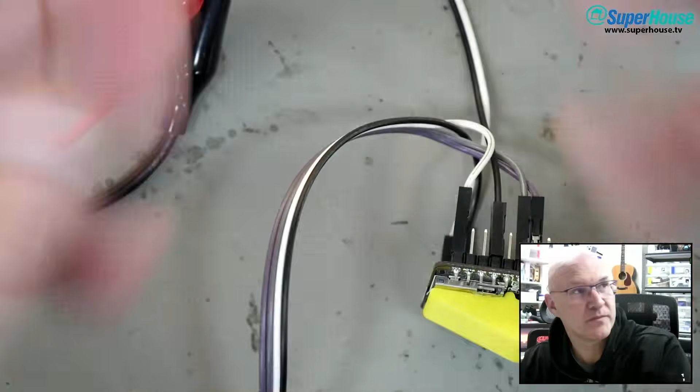Smoke, smoke, no smoke. Okay. So now it should be, yeah, it's actually getting 3.3 volts off that. So I should disconnect that just to be on the safe side - V out, it's the white one. Disconnect the white lead.

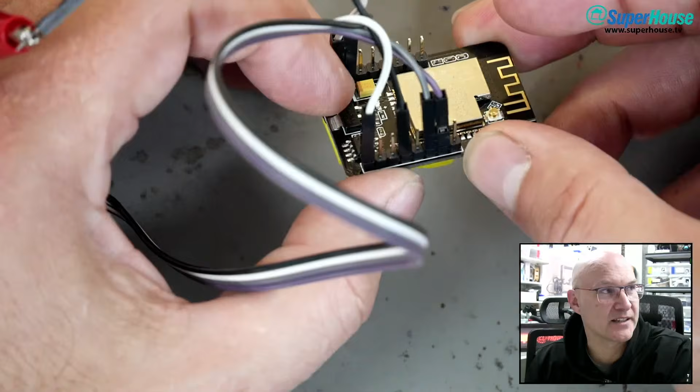So it's now being powered. Austin's_creations said one of the VCC pins on the module is 5V, not 3V3. Yes, exactly, that's what I've just connected. So I'll press reset now. It should now be running off the 5 volt rail, and it is. Ooh! Look at this. Look at this.

Hopeful. Camera demo. Detected OV2640 camera. What I don't know is what IP it's got. Looks like the serial output stopped right there. Where's the kaboom? There was supposed to be an earth-shattering kaboom.

Yes, Stephen, you are correct. I can give Jon a recipe for kaboom dust for next time, says Vic. Yeah, if anybody knows about kaboom dust, it's probably Vic.

Now, I think it's a long shot, but I'm just checking whether any device has appeared in the UniFi thingamajigamy. It has not, because, yes.

All right, I'm going to, where is the clear button? Is it that one? Toggle timestamps. No, that's toggle auto scroll. Where is the clear button in this stupid serial console? Is there a clear button? How do you clear the console in Arduino IDE 2? Why? Is this yet another example of something that was working perfectly fine and then it got enshittified? I think it probably is.